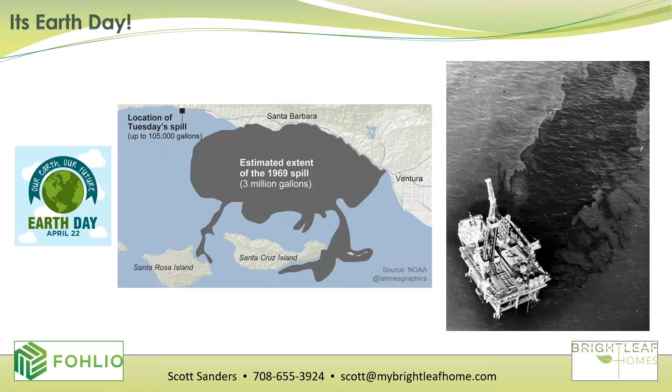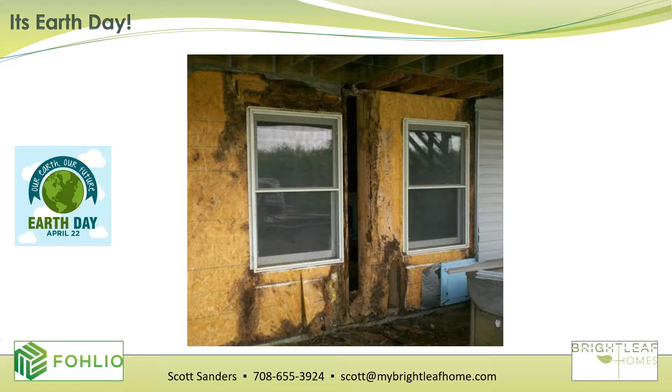Unfortunately, since that time in 1970, things have gotten better, but not gotten perfect. And so we still deal with a lot of smog, and we still deal with building durability problems. That's where green and energy efficient just won't cut it. That's where high performance starts to come in - building durability and building better homes, not just more energy efficient homes, but ultimately homes that are going to last longer, homes that are not going to find their way into the landfill, and homes that are going to contribute to healthy indoor air quality for the occupants inside of them, since we probably spend - I think the national statistic is 16 to 18 hours a day - inside homes, office buildings, and things like that. So indoor air quality, durability, and energy efficiency all roll up into the term of high performance building, whether that's for residential, commercial, industrial, schools, whatever it might be.

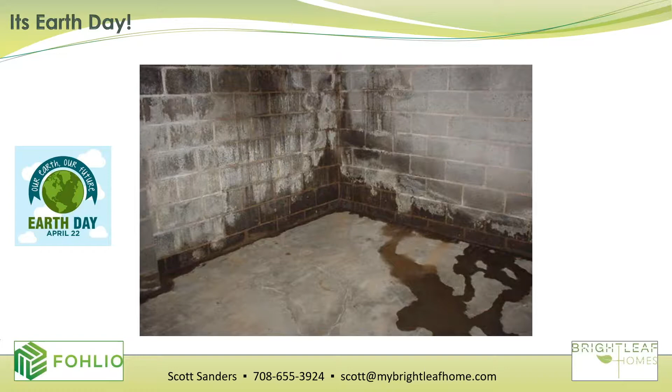So that's just a little bit about Earth Day, and we'll go on from there and start talking about what we're going to cover here. We're going to talk about what Brightleaf is, what high performance building is, sustainable design, and why it's important to understand and incorporate it into what you're doing both in design and build.

We're also going to take a quick look at the practical aspects behind the curtain of Brightleaf and what we do and how we do it, both from a design standpoint—specifying materials, assemblies, plans—but also from a practical building standpoint.

We are not technically a design-build firm here in Chicago. We do work with outside designers, architects, and engineers to develop our plans, but we're very heavily involved in the design of those plans, making sure they holistically meet our approach to sustainable residential building.

Here's what we're not, unfortunately. We are not old school builders, and there's a growing contingent of builders in the US participating in above-code programs, anything from LEED to Living Building Challenge to USGBC and the National Green Building Standard, trying to build the homes of the future, not the houses of the past. The old way of doing things is dropping a bunch of sticks in the front yard, designing the home on a stock set of plans maybe 4 or 5 pages long, building without any specifications, hoping the builder executes the plan properly in the field, and then just throwing the lumber together.

This is a picture taken from a job site around the Chicago area, and there's something terribly wrong with this picture. This house is mostly built, and there's a lot of lumber left laying in the mud in the front yard. Obviously it's been raining, it's exposed to weather. House wrap detailing on the house in the background isn't very well installed.

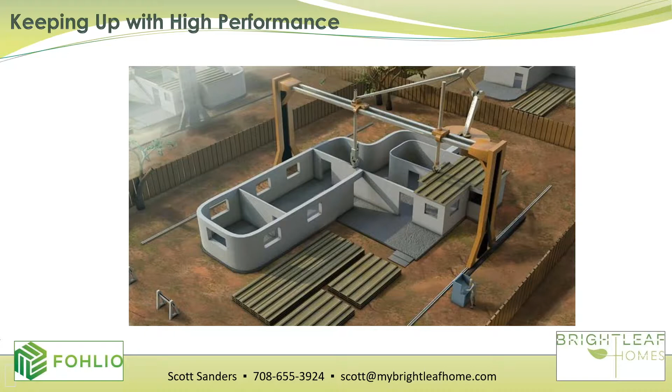All kinds of things are wrong with the general home building industry today, which is where high performance building comes in. High performance building means building better than code and having a holistic approach to how things are built. Keeping up with and ahead of code and ahead of the curve is important. That's why this goes beyond high performance building to high performance design and specifying of assemblies, materials, and details, because that's truly going to be the way of building for the future.

This is actually a graphic of a model 3D printed home. This is a home that's essentially extruded with concrete through a trellis system, with floor panels stacked on the ground and put into place mechanically as well. There's an operator down there. What's probably going through your head right now is, oh, that's cool, that'll probably be around in 20 years or so, and we can all do what we're doing now and be okay. Unfortunately, we can't.

We, as Brightleaf, and some of the other high-performance builders across the country, are still building conventional wall systems for the most part. We're using 2x4s and 2x6s and super insulating those with exterior insulation or insulation in the wall cavity. We're building regular concrete or concrete block foundations and traditional stick frame roofs with asphalt shingles. And that right now is above and beyond what a lot of other builders are doing across the US.

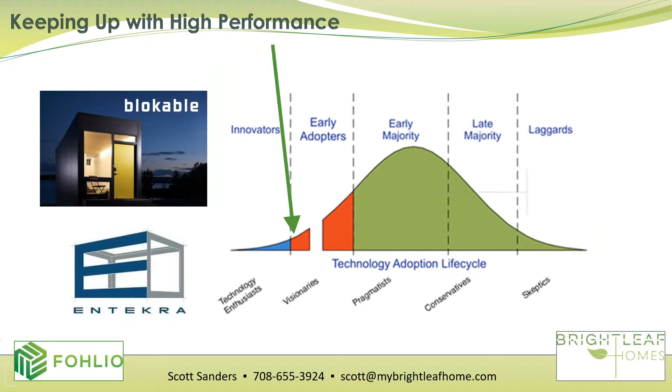High performance is awesome, but of course it costs more, as it should. High performance homes perform better, they're more durable, they're longer lasting, and because of that I'd hope people would expect to pay more for them. They also take more effort to design and specify, more effort to engineer properly, and more money to engineer properly. They should cost more, just like you'd expect to pay more for a BMW or an Audi than for, say, a Chevy Aveo or some small domestic hatchback.

That said, when you look at total cost of ownership, high performance shouldn't cost tremendously more, because ideally the long-term maintenance costs, utility costs, and insurance or healthcare costs for families living in those homes would be lower than you'd typically find.

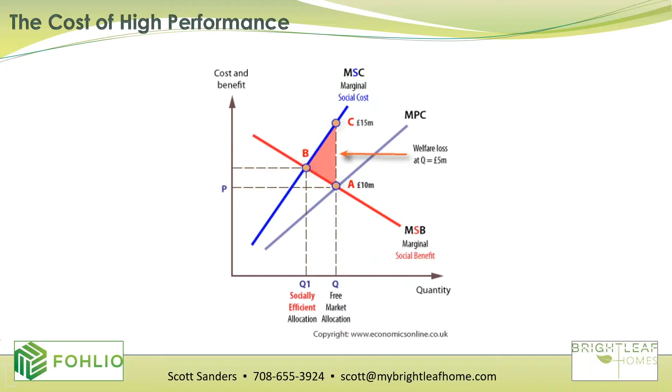So calculating the cost of a high performance home is extremely complicated, and you have a curve and a graph. No—ideally the cost of building a high performance home should be pretty linear. As you put in an extra dollar of insulation or an extra LED light fixture or high-efficacy lighting, you should see that dollar back along the way. But what we've actually found in designing, building, and specifying for high performance homes is the cost-benefit curve looks a little different: there's lower incremental cost for higher benefit up to a certain point, where the inflection changes and it starts to level off, and you just spend more money without seeing significant improvement in benefit.

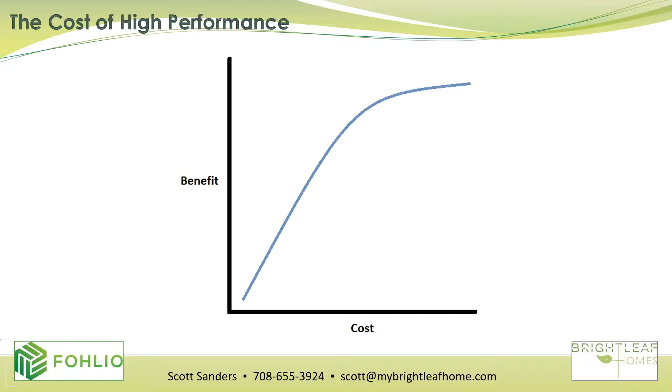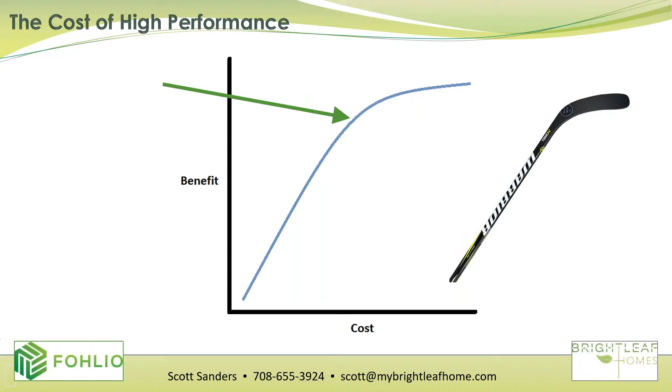This graph is also useful for talking about above-code building programs. High performance home building is relevant to the market because there are third parties who can certify homes and buildings—office buildings, schools—as above-code buildings that meet these third-party certifications. Some of the certifications include the Energy Star program from the EPA, similar to the rating on a dishwasher, refrigerator, or light bulb you might have that's rated for Energy Star.

It essentially says that the home or product is more energy efficient and will last longer than a competing average product on the shelf.

As you go one step up from Energy Star, and one step further up in cost but also in benefit, you get to the Zero Energy Ready Home program from the Department of Energy, which takes into account everything in Energy Star and layers on top more about durability, energy performance, and being solar PV ready. The National Green Building Standard is also right around the Energy Star level in terms of performance requirements and cost benefits.

Going down the curve before we go back up is the newest International Energy Conservation Code. Illinois is on the 2018 code, but a lot of the rest of the country is on the 2003, 2006, or 2009 codes, which is frankly building houses of the past again.

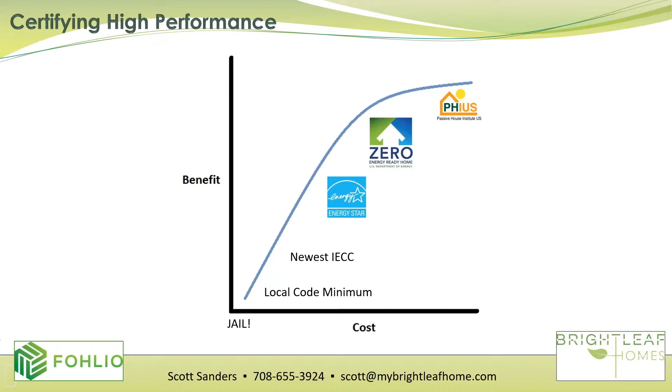Those programs are extremely important because they're pushing down the adoption curve for technologies to be more cost effective for programs like Zero Energy Ready or Energy Star, and eventually like the International Energy Conservation Code, which would essentially be building a home to code. So those programs, and the details, assemblies, and checklists in them, are very necessary for pushing this market forward.

How do you get these third-party certifications in the homes that are built? Well, we go through what is generally a checklist, regardless of the program we're participating in.

All of the programs illustrated on the previous slide are checklist-based, meaning you fill out a checklist to ensure you're designing and specifying a home properly upfront, making trade-offs as much as you can in the design and pre-planning of the project.

As you go through the project, you're building to those specifications, designs, features, and assemblies. Then at the very end, a third-party inspector comes in to verify that everything was installed and detailed properly, as called out on the plans and incorporated into the design and preliminary rating.

This is an example of the LEED checklist from the U.S. Green Building Council, covering things not just related to the building envelope, but also locations, sustainable sites, and materials, including where they come from and how they're transported.

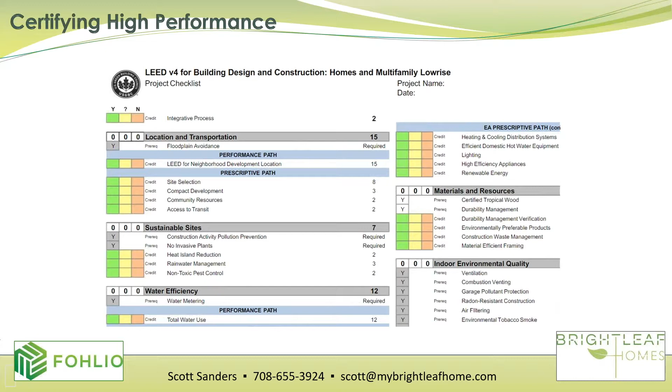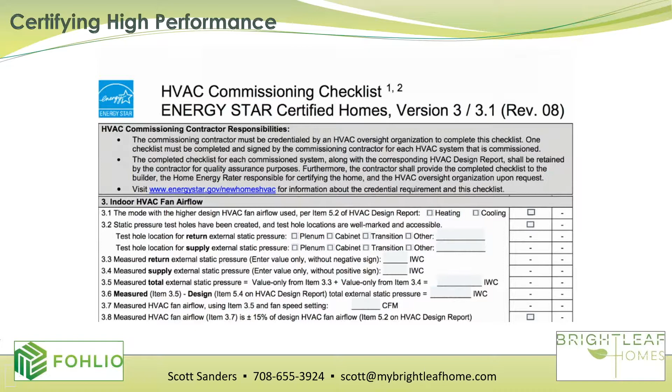This is an example of the Energy Star HVAC checklist. Along with general energy efficiency, things have to be installed properly, but they also have to be tested to make sure they're functioning as intended. Energy Star has a number of checklists, as does LEED and the other participating programs.

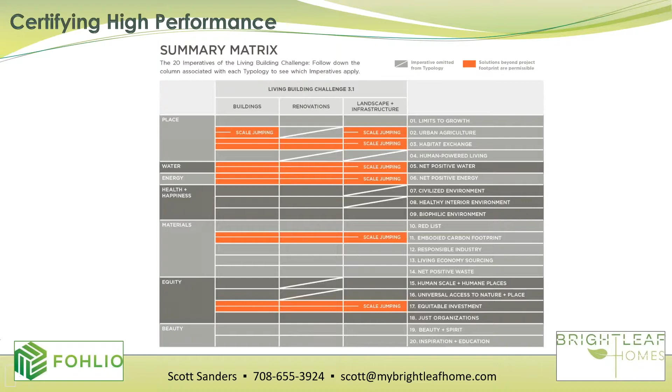This last one is from the Living Building Challenge, another checklist format that takes into account things beyond energy efficiency, which goes back to my comment at the beginning: we can't just build green or energy efficient, we have to build high performance.

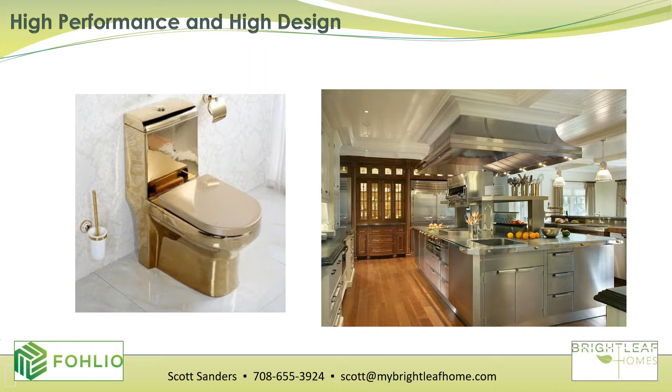Going back to cost and benefits design, that's probably not a dual flush high water efficiency toilet on the left, but it is very nice. The kitchen on the right, an amazing chef's kitchen, could certainly be installed if energy design guidelines are incorporated with LED lighting and fixtures. But what we see most often are very nice, conservative finishes that don't cost a phenomenal amount of money in the homes we build here in Chicago.

Our average selling price point targets the move-up buyer, so often our families are coming from an existing home, townhome, or condo, moving up into one of our homes. The finishes we're specifying and the designs we're planning are fairly moderate—not that chef's kitchen from the picture before.

We install dual flush toilets. We install, as you can see, high performance exhaust hoods, LED lighting, hardwood flooring with no VOC coatings, solid surface countertops, and low VOC cabinets—all things that contribute to healthy indoor air quality and better performance for the family living in it, without going too far overboard with what our families are able to afford on a monthly basis.

So we're going to jump into the second-to-last section: how do we actually execute this after it's been designed and conceived of by the client or someone in our office? The answer goes to a lot of pre-planning. Proper planning prevents poor performance. We strongly believe in complete plans and specifications for projects before we start, and we believe in the design-build philosophy of having an integrated design team up front doing design, engineering, architecture, interior design, and exterior landscaping design—all of that contributes to a successful project built on budget and on time.

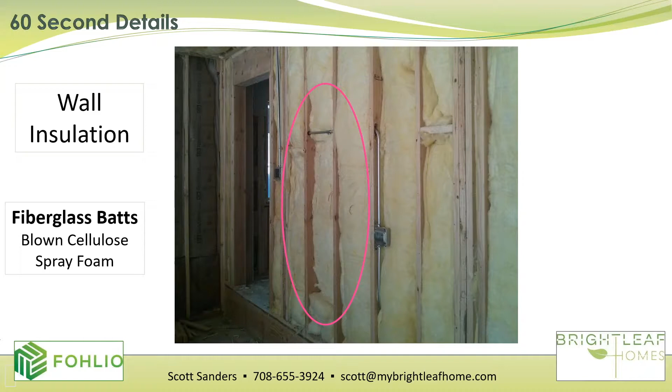Going back to specifying briefly as we're talking about plans, some of the things we do to build high performance homes are fairly simple and straightforward. It's just done a little bit better, or it's actually following the manufacturer's recommended installation instructions. It's amazing how energy efficient, durable, and healthy a home can be if you just follow what the directions say. A good indicator of this is wall insulation.

This is a conventionally framed wall with fiberglass insulation. We're standing in the garage of the home, which is a competitor's home in the area, looking into the mudroom area on the other side of the wall. What we see is a poorly installed fiberglass insulation job. Those fiberglass batts, like all insulation, are meant to fill the entire cavity with no voids, gaps, or cracks. This installation error will lead to a poor performing wall because we'll have thermal conductivity through the wall and convective loops, which will decrease the insulation's performance and make the laundry room on the other side of this uninsulated garage wall pretty chilly in winter or hot in summer.

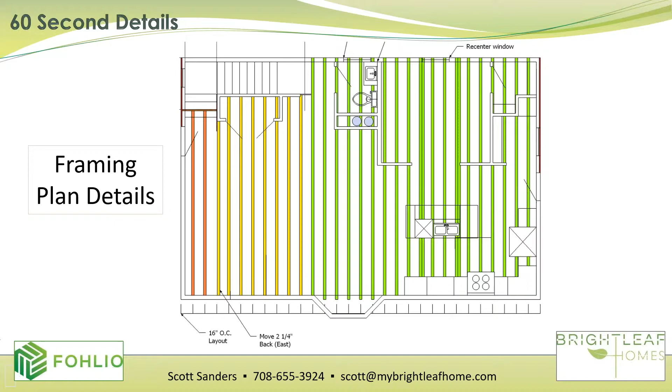We want to make sure that floor plan and joist layouts are completely thought out. This is a 2D floor plan overlaid with the joist layout, which is color-coded to make sure the right joists are being installed and cut in the right locations. We've also made sure the designer overlaid the plumbing and floor plan to avoid intersecting walls, toilet flanges, sinks, or anything that would interfere with the floor joist layout. Just a bit more proper planning on floor systems.

Another thing we do, and make sure our designer and architect specifies, is wall panel layouts. This is an effort to make sure we're using materials efficiently on site. Building green is more than just energy efficiency—the less material, the fewer natural resources we put into our homes while still having them perform and be structurally sound, the better for us.

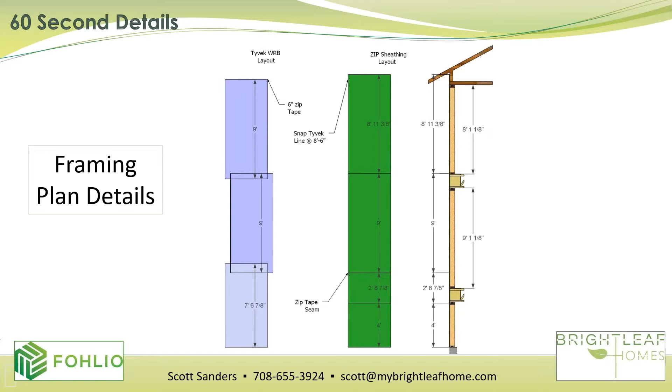Color-coded graphics are much nicer in the field. Obviously our framing and carpentry contractors and subcontractors can read 2D plans—that's what they've done for a long time. But if you can make something much simpler to understand, you greatly increase the odds of it being done properly the first time, without rework.

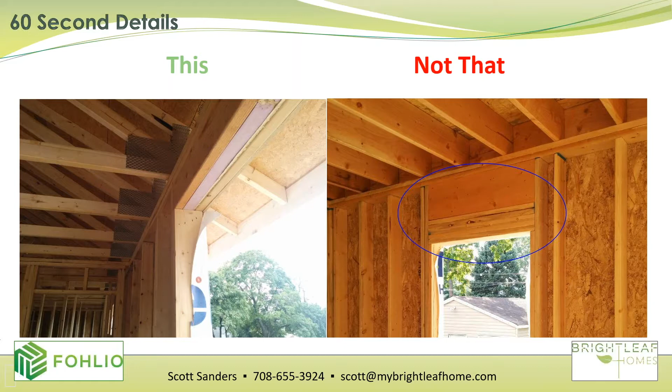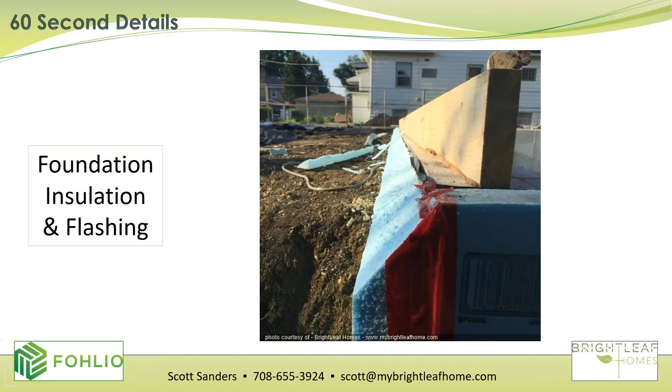Here we've only cut the back section and tapered it, to make a transition on the outside that's aesthetically pleasing, so you don't have a shelf that can hold water or snow in our climate. That then gets covered, as you saw in the previous screen, with a sheet metal flashing that goes down below grade and hides all of that nicely.

Continuing forward, this is important in specifying and designing mechanical systems. High-performance buildings aren't just durable, and they aren't just energy efficient because they have more insulation in the walls. Hopefully they're energy efficient because they have advanced mechanical systems that are carefully and thoughtfully designed and carefully installed.

So as you're designing and specifying plans, please don't forget to think carefully about mechanical system layouts, how ducts are going to be run, and where you can get things through, to make sure the installer doesn't have to think it through in the field, where they'd be less likely to take the proper time to carefully install that system.

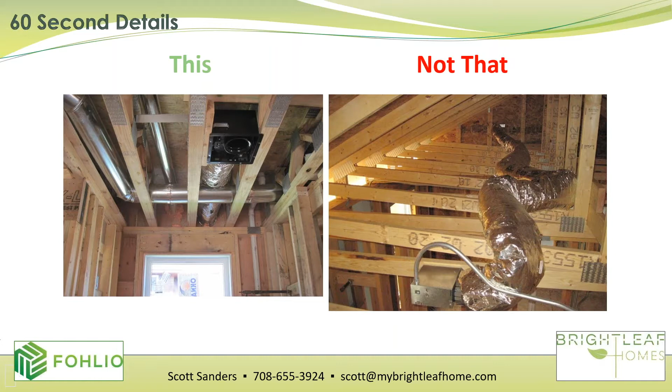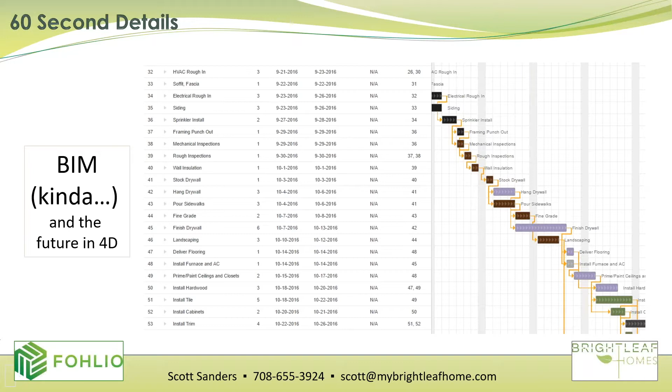The next iteration of this will be to layer it onto a 3D model like we have here, which is BIM, Building Information Modeling, to generate a 4D model. So not only building this home virtually in three dimensions with components and pieces, but doing it linked with the schedule we show to our trade partners or the client, so they can see, literally over time, that on Monday April 22nd my home will have the 2nd floor roof on, and here's what that looks like in the 3D model.

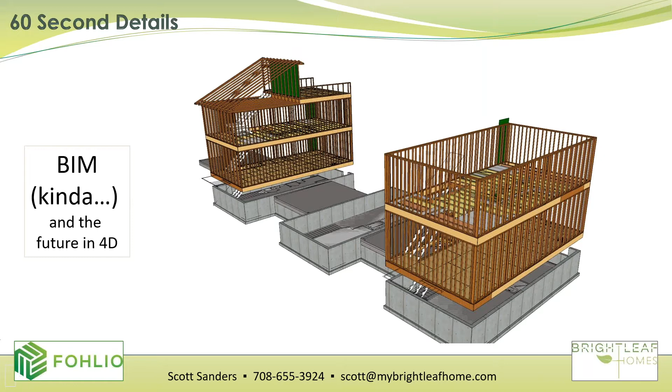Technology is going to come faster than we probably might like it to, and the earlier we get on this bandwagon the better, frankly, because it's going to help us design and build better homes and make much more satisfied clients and customers who can appreciate the effort and intent that all of us as design and building professionals put into the product we're putting out onto the market.